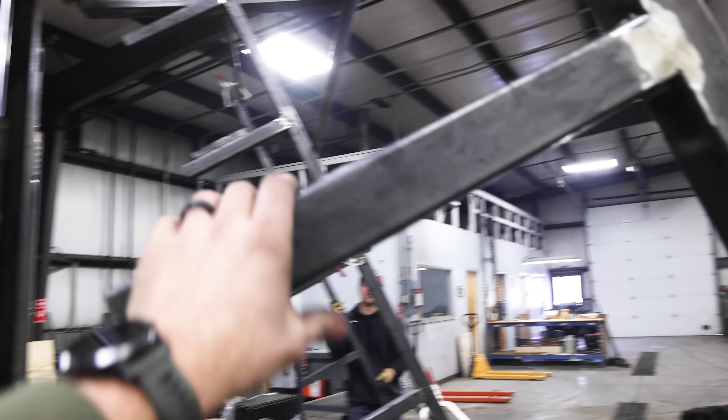My God. Let me set this down somewhere. No, keep going.

So we've been in the building for over 3 months now and mostly focusing on the wood shop. We got the dust collection, the CNC room, a bunch of other stuff going on over there. And we've neglected the metal shop for the most part. Over here sucks. We've got this a little bit organized, but over here has kind of been like a dumpster. And because of the way we're using the wood shop, we're taking all of our deliveries through this door, so we have to clean up this area.

One of the things we initially spoke about doing was essentially just making a lumber rack for metal. A metal rack, some might say. Initially I thought I wanted to put it on this wall and put it here. But after thinking some more, with the amount of slabs we're planning on having, we're gonna need somewhere to store those. I think it would make more sense to have slabs vertically stored over here, as well as the other side eventually. So here's what I'm thinking. The metal shop only has one wall, and some people like wide open space. Me personally, I do like having places for things to go — like where do we hang our helmets, our jackets, our angle grinders, toolings we're grabbing all the time.

So we have a ton of clamps, a bunch of stuff. Here's what I'm thinking: if we put a lumber rack right here that isn't permanently affixed to the floor, but fixed enough that it's not gonna move, we could do the metal storage on this side with a bin for cutoffs on the end, and then on this side, a wall, essentially, maybe a shelf on it for storage for things we're grabbing often while working in the metal shop. I've done a few small projects over here — what I find is I'm running over to that toolbox. We've got another toolbox over there that's buried that we could have sitting on the end of this for better accessibility. Because we're not screwing it to the floor, we can move it around easily with the forklift. So that's kind of my vision.

Okay, time to fabricate some stuff. John gave us a plan — we're actually gonna change it a little bit. Instead of doing 5 vertical pieces, we'll do 3, but I've got a cut list. I'm gonna go find Jordan and start chopping up some steel to get this thing put together.

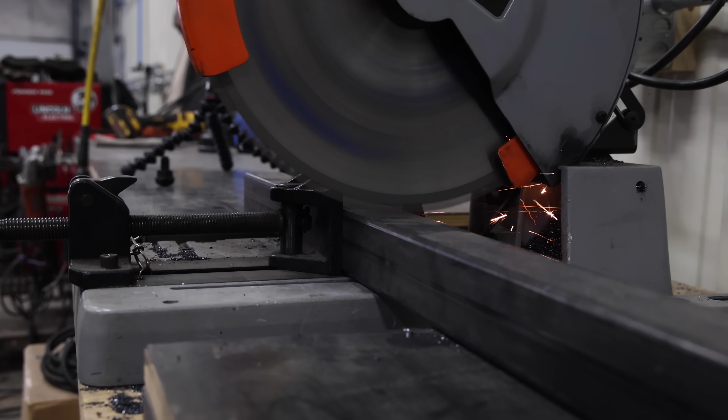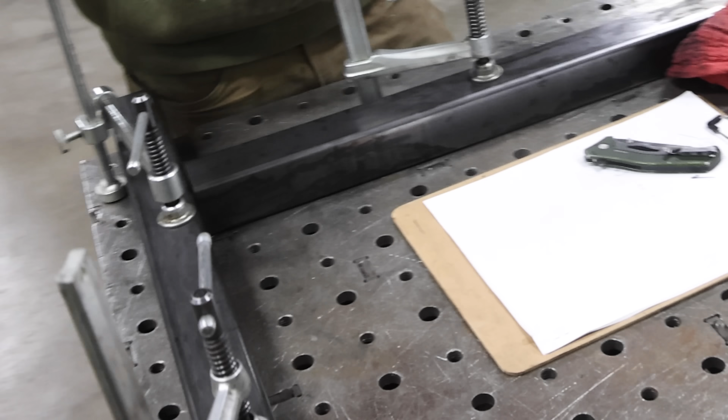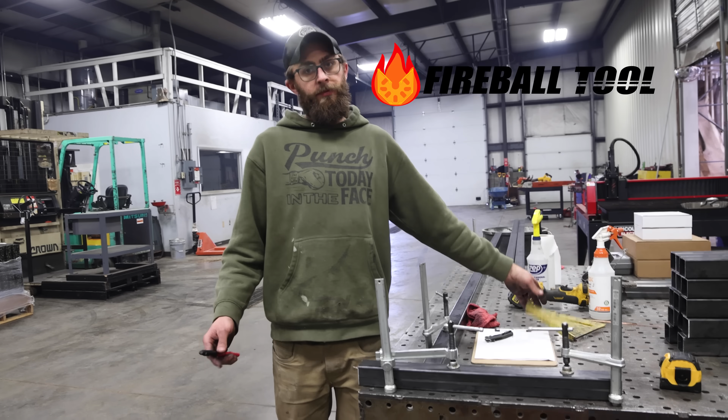Got the black lung. So we've cut all our parts — there's a bunch of short pieces, some medium-sized pieces, and some really long pieces. We didn't cut the other ones yet, but I want to make all the parts first. One cool thing I feel like John never utilizes is using a precision welding table like this — if you use the dog holes in the table, you can press your piece against them in both directions before you clamp it down, and then the thing's square. We'll double check it because we have these cool new squares from our friends at Fireball Tool. It's a good little tip if you don't have a square or you have some weird big thing — the table is square.

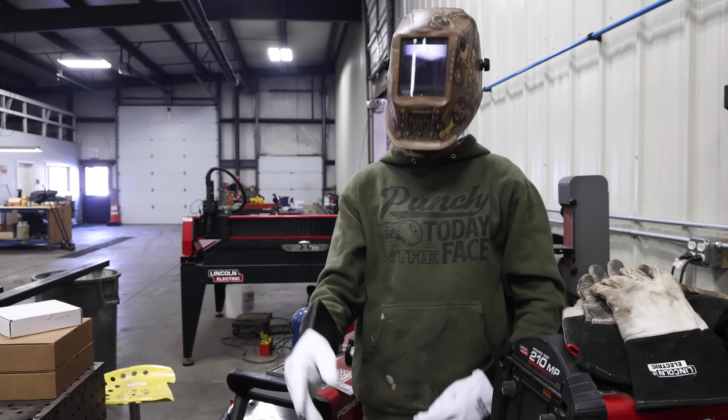Well, as John's former boss Mike Tomlin would say, the standard is the standard. John gave us what I thought was a detailed drawing of what he wanted, but one of the critical measurements, the spacing between all the shelves, is missing. When I asked him, he didn't seem to know until he gets back from wherever the hell he is.

Jordan and I are gonna continue cutting up the pieces for in between, and we'll keep going here. Jordan, I can't see, I'm walking backwards, so don't run me into anything.

I just got back from an appointment. What did you idiots get done? I made 3 L-shaped things. That's literally it, I was gone for 5.5 hours. That's not even, but you were gone for like 45 minutes. I have another appointment in a bit, I also ordered lunch. 45 minutes? Ooh, lunch? Yeah, there's a new wing spot we're gonna try. Ooh chubby, and we got a new toy.

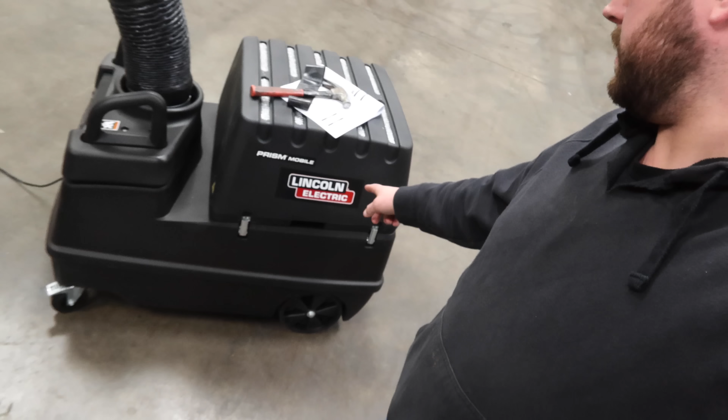So as you guys know, we work with Lincoln and they like us to be able to breathe real air. So we've got this, which you probably saw Sam using already. If you're curious, it's a fume extractor to keep the fumes away. That rolls.

So we've got these parts cut. I think I actually want to put a back angle onto our supports, so we'll set up the chop saw to just put a 1 or 2 degree angle on those, help things lean back. And then we'll get those burned in. We'll do one and then lay the other ones on top. Sam will make a spacer. Let's go.

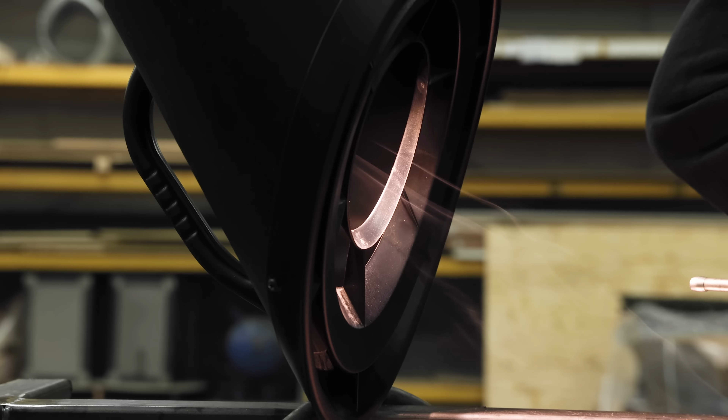That thing's cool, it needs googly eyes. My lungs are grateful. Also, lunch is here.

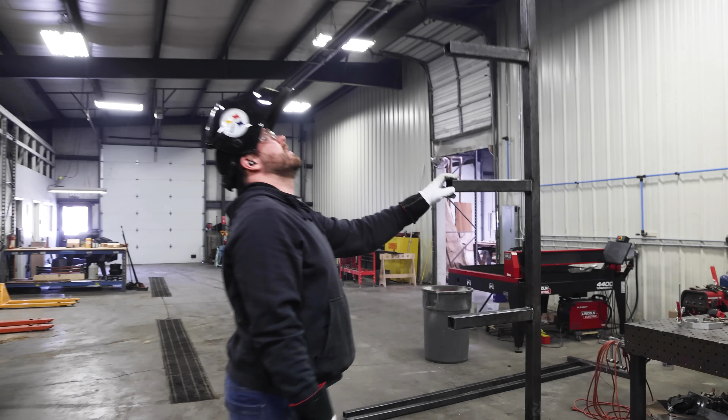Yeah, we'll put it like here, 10 feet. Gotta make a couple more. But first, food's here, let us eat.

Great dilemma, we're having lunch. Debate almost as old as time. The question isn't, is this a wing? Because it's not. But do you prefer boneless wings or real wings? Because Sam, Jordan, and my wife all got boneless wings. All 3 of them have something in common. We're smart.

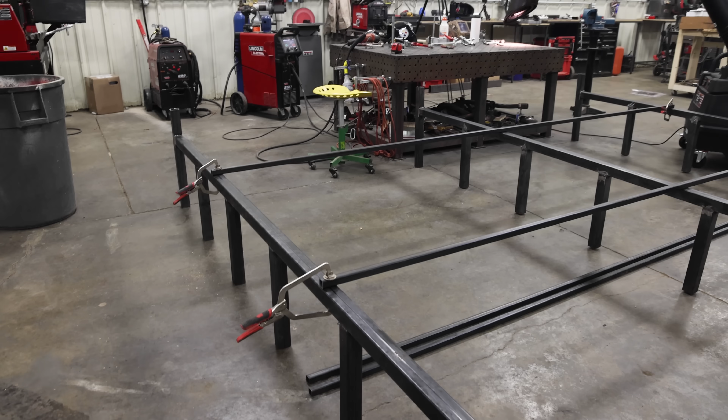John welded one and left us again, but I'm getting it all laid out. As you can see here, we went from there's gonna be 5 cross pieces, we're gonna go with 4. I have it spaced out so that we can hang a piece of plywood horizontally across it, and that way we have a wall to hang some tools and stuff.

And I set it at 36 inches, so it'll be countertop height, so we can roll a cabinet or something, or build a counter under it and make another work table. So I've got it kind of squared, I've got 2 pieces mocked in, waiting on Jordan to get the last one in. I'll find the center, this thing should be a rack here very, very soon.

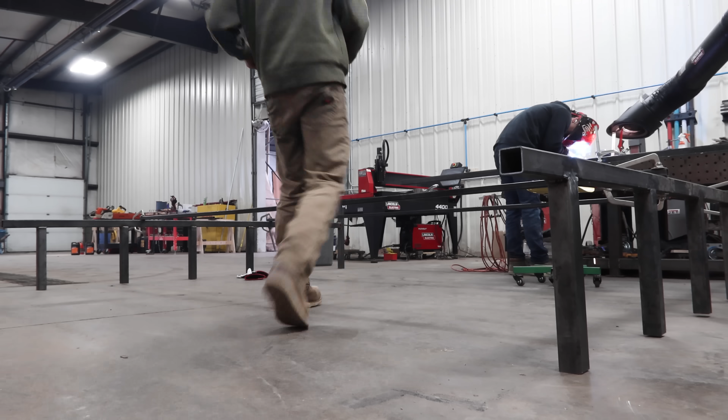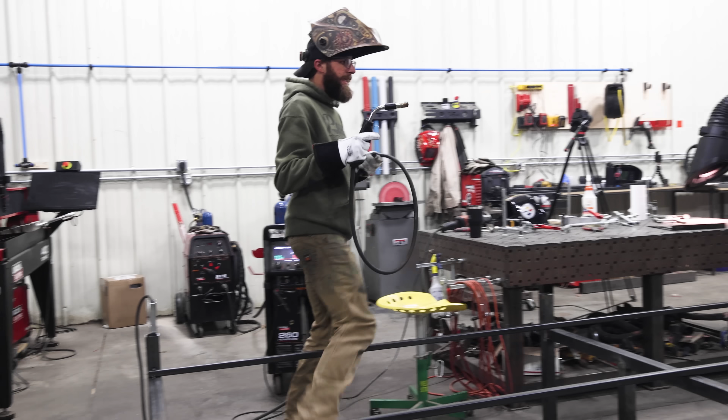Okay, so I finally finished burning in the rest of the shelf rung, and we're mocking up the big old thing. Tacking this thing up, and then we're gonna stand it up and see how it looks. The last thing we wanna do is this thing be all crooked before we weld it all in, that would be a lot of work to fix.

So one, make sure your ground is on the piece you're welding to, like it is over there. But if your welds suck, move your ground closer to where you're welding. Typically you don't have a good enough bond and your grounding isn't getting to the ends of your piece.

When we do the full weld, we'll work from this corner to that corner to this corner to this corner, so you're not pulling yourself out because we can't keep this thing flat. Gotta bring out the big guns, old Ninja Turtle. See how good Sam's tack welds are, huh?

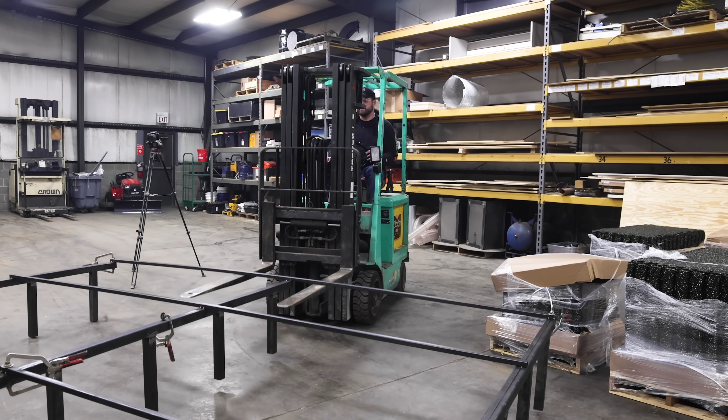Oh my God, let me set this down somewhere. No, you're good, keep going. Don't let it fall on you or the dog.

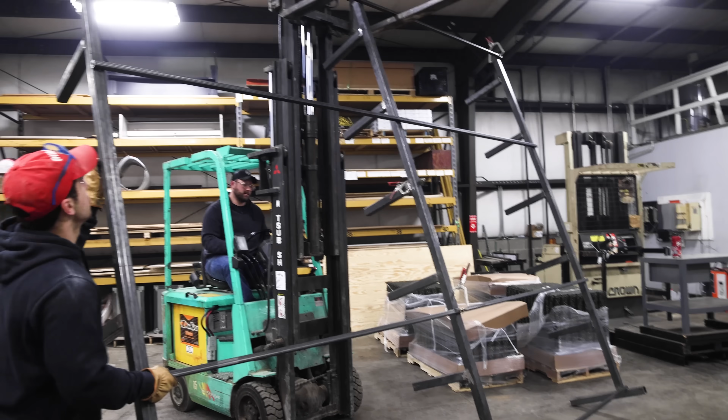Fair, not a great spot for trusting tack welds. Maybe lean it forward, no, lean it. You're gonna hit your shaft.

Can't wait to get up in the air and weld it now. It looks good though, where is it gonna live exactly? Kind of leaning this way, the floor slopes to that drain. So we're probably gonna have to shim it to plumb and then bolt it to the floor.

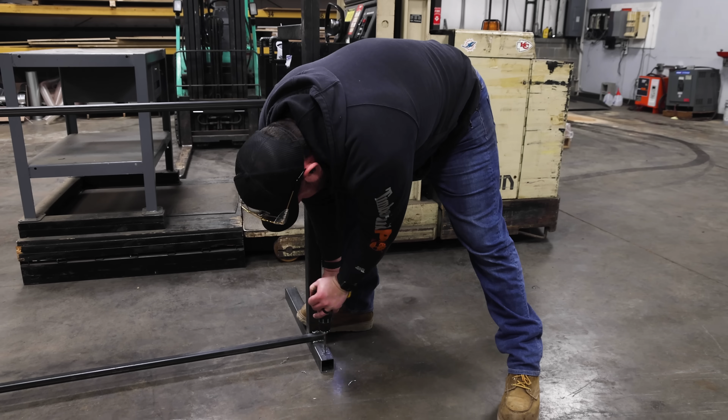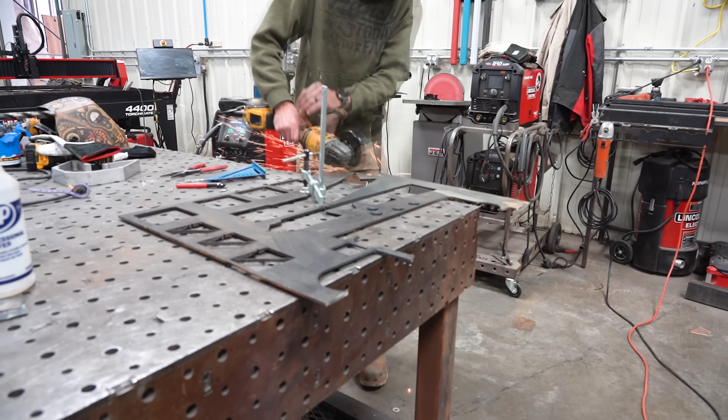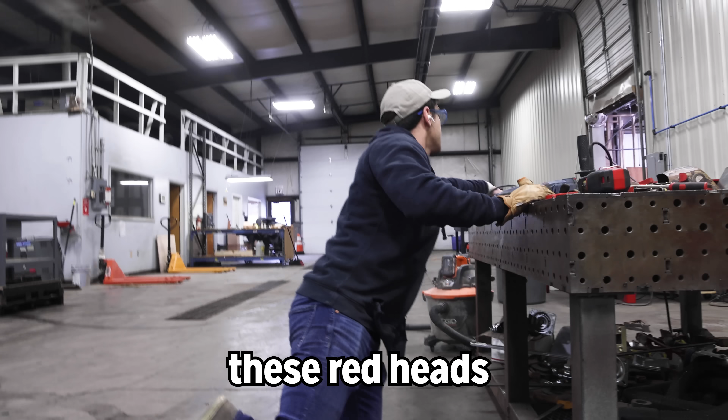So there's a lot of racking in this, and we're more worried about the Tapcon snapping. If it racks too much, they're not really in that deep and they're pretty thin. So we bought these red heads - they're sleeve anchors, so they have a lot more grabbing power. Drop that in, hammer it in, then tighten it down and it'll expand. It's a lot more, the technical term is oomph.

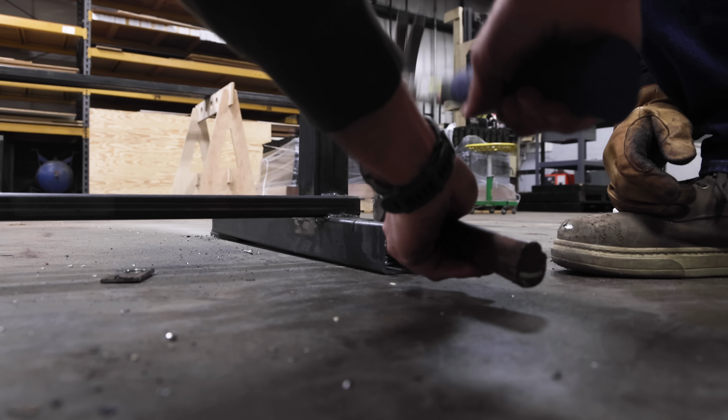Tried drilling in, but we figured it's faster to cut it. I like that a lot better. I didn't love hacking a hole in it, but I don't have a better answer.

Okay, you may be asking yourself, are we having fun? Absolutely not. We've been getting our asses kicked all morning. I had to make all the things by hand because the plasma cutter decided not to come to work today. It's just been a mess, but we're getting some brackets put on it. Hopefully this will shore this thing up.

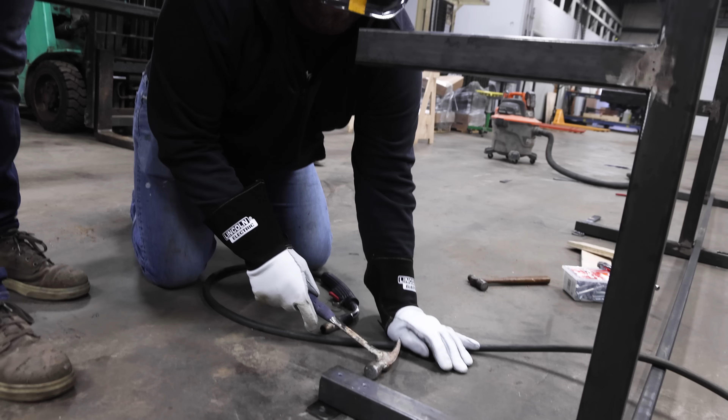I feel a lot better about these. I don't, because I had to crawl on the ground. I do think they're a better solution. Team morale's low, we've all had a rough morning. Send it - we'll wedge them as we screw them down.

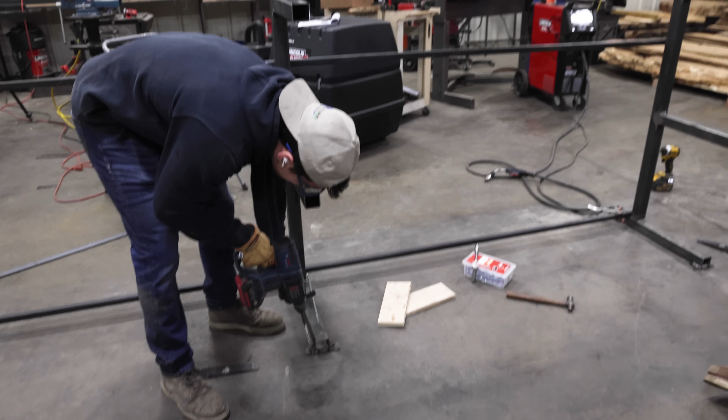Brackets are welded in. Sam is strapping her down, and then we can hopefully whip together this mini storage bin thingy. Once again, it's supposed to be a quick one, but we screwed it up.

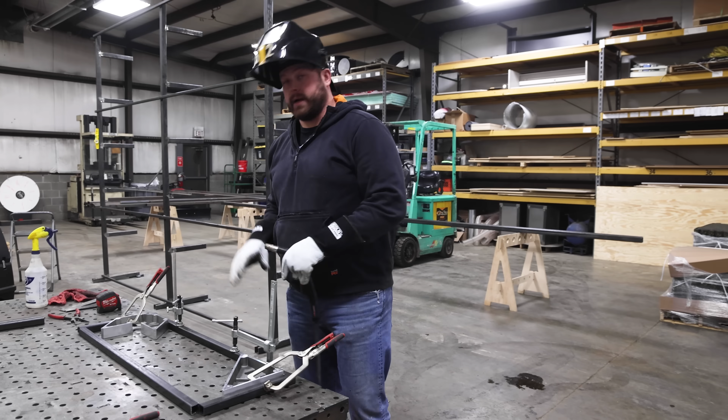All right, so the next thing we want to build is this little scrap cutoff kind of part bin thingy for shorter parts. Because we made our span so wide, we ran out of materials and can't go wider. So I'm just going to weld up a bunch of boxes and stick them together, and it should work pretty good. It should go quickly, I hope.

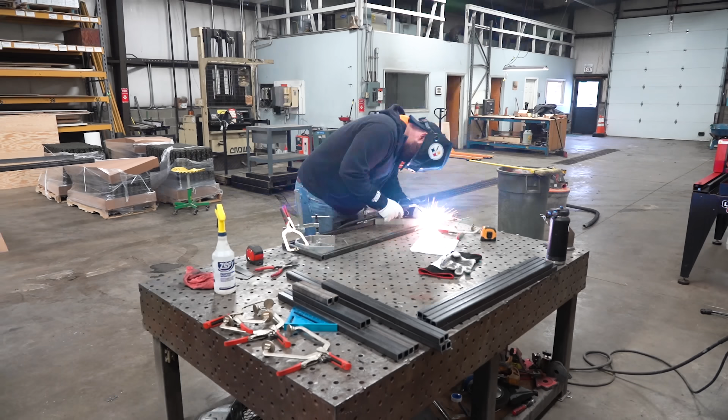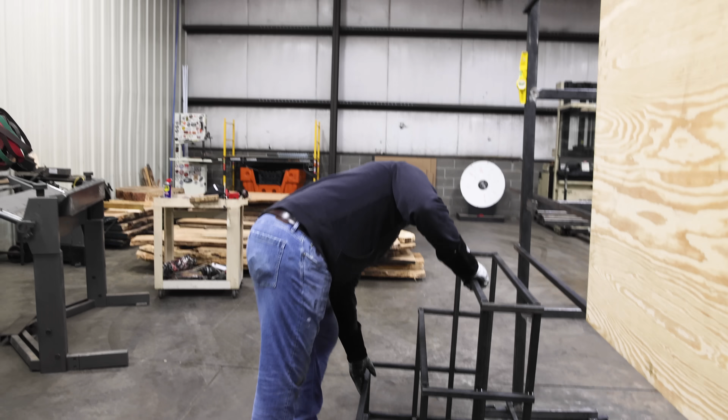Just ticky-tacky-toe together. Let it hunker down here, and then leave enough space to get a little bit of organization over there. Good work. Ooh, I will say there's one thing I wanted to do.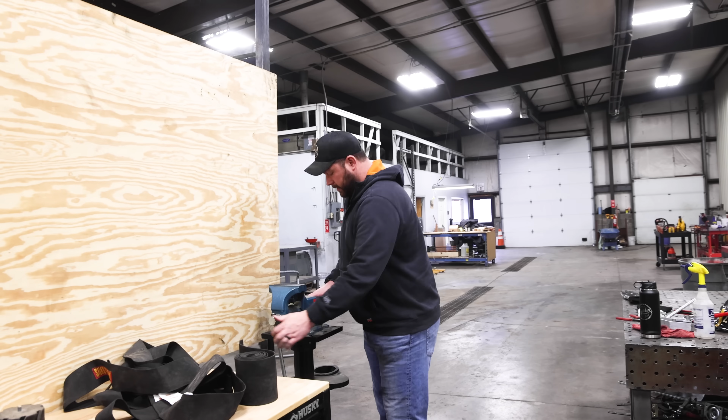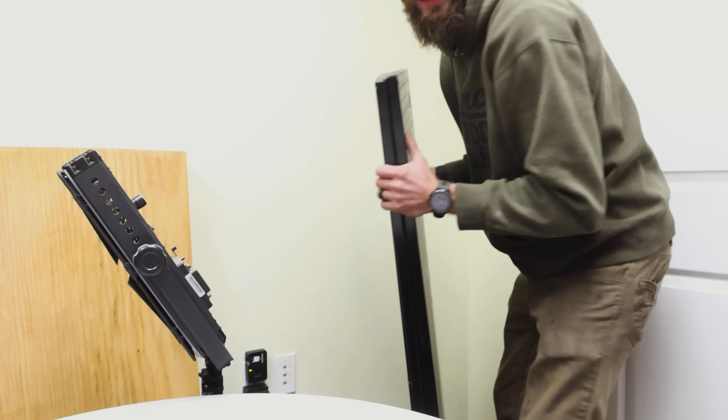So we wrapped up the storage wall rack thing last night before we went home, and I was thinking about it, and I came in and looked at it today, and I think I have a better solution for what we can do up here. I have these wall control panels that used to be where I kept all the photo gear. They never got put back up, but I think these could be a great solution for in the metal shop.

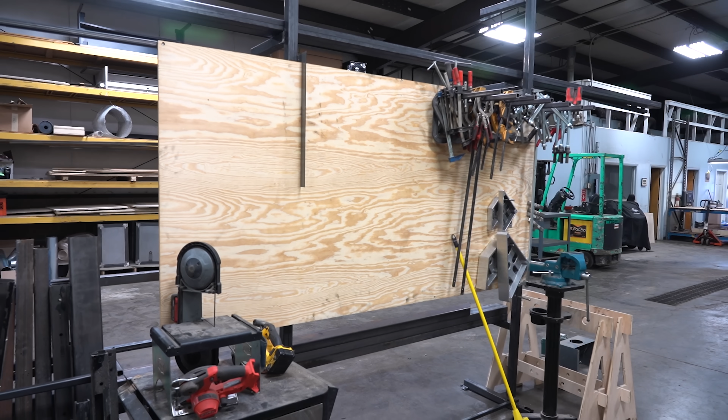Be kind of cool, so I think we're gonna go sticking these up. But first I just gotta undo all John's hard work because this is better. I was gonna tear everything down, but I kind of like how John had that clamp rack, but I think we could be better with these guys starting on this end. I think I can make it fit and still keep the clamp rack. I might have to move it a little bit, but I gotta find a step ladder.

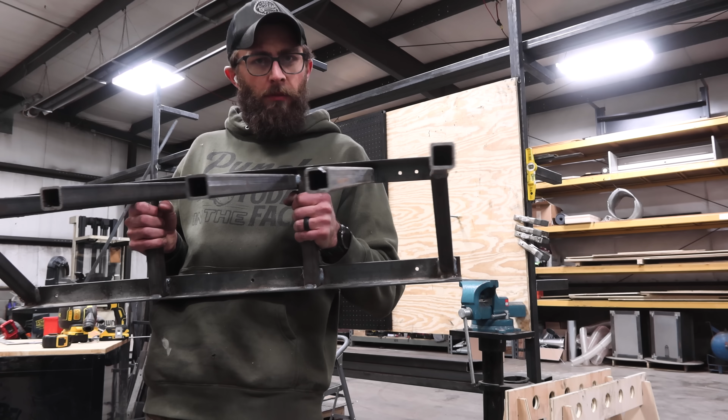All right, so the wall control is up. This was a lumber rack that I built many moons ago. I'm just gonna cut it down to make it fit so it doesn't stick off the end all stupid, and we'll lose one rung, but who cares? I'll just chop it off, chop out these other parts, and then we'll weld it over a rung and slap it back up.

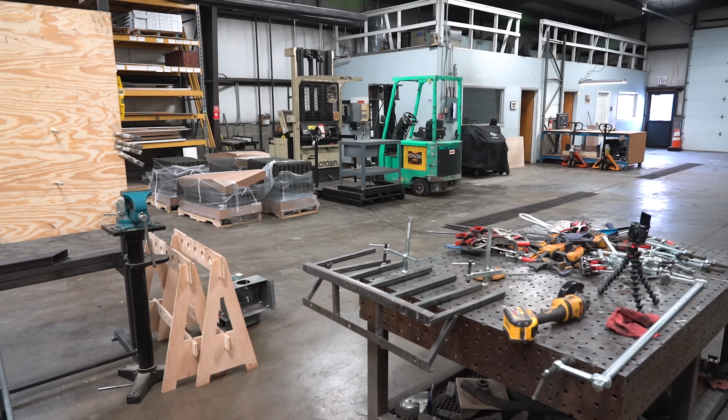Got this thing fixed. I ended up just cutting a rung off of it so that it would fit a little nicer. Get this hung up, get everything put where it goes, find all the clips for these things, and get this place looking sweet.

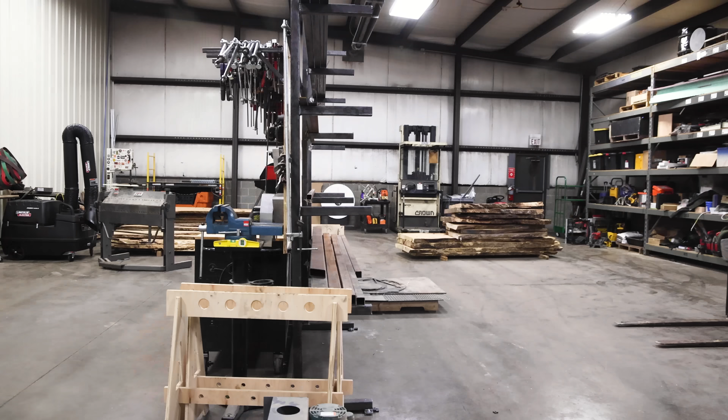John's back, Jordan's here too. Great solution, hope you're not mad. I think it's the perfect option for the wall control. A lot better than what we would have done. I agree, to make us a little bit more efficient.

We'll organize the toolboxes and stuff after, but besides that, I think this might be a wrap. I think it's a wrap.